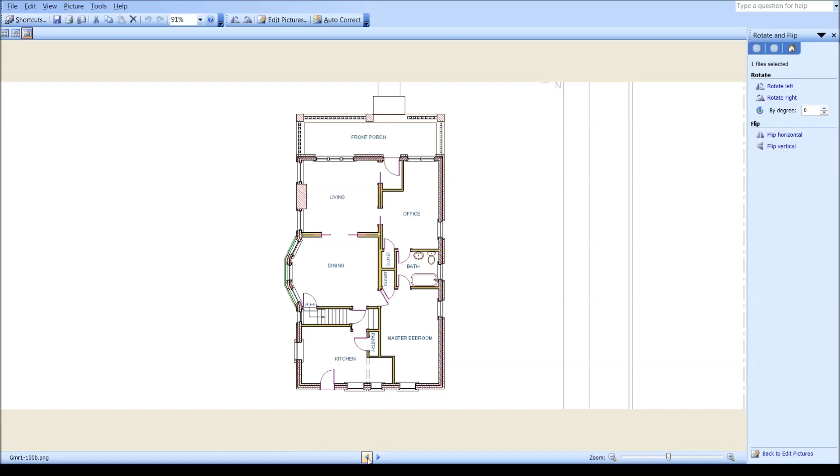Everything works out to within an inch or so, except with regard to the most important part. One of the reasons, among others, that I had to model this entire structure, particularly in the first floor, is because it's this sort of a house where the second floor footprint does not overlay the first floor footprint exactly, and I had to try to locate that.

Now this is the first floor footprint in the red here underneath, and I had to try to locate it, and all the measurements work out where it's lining up where a person would expect, here and here and here. And the way I located the second floor was centering the dormer measurement on the center of the building, and using that in combination with measurements from the stair, that was how I located these walls here. So these were the main walls going in that were located according to those items.

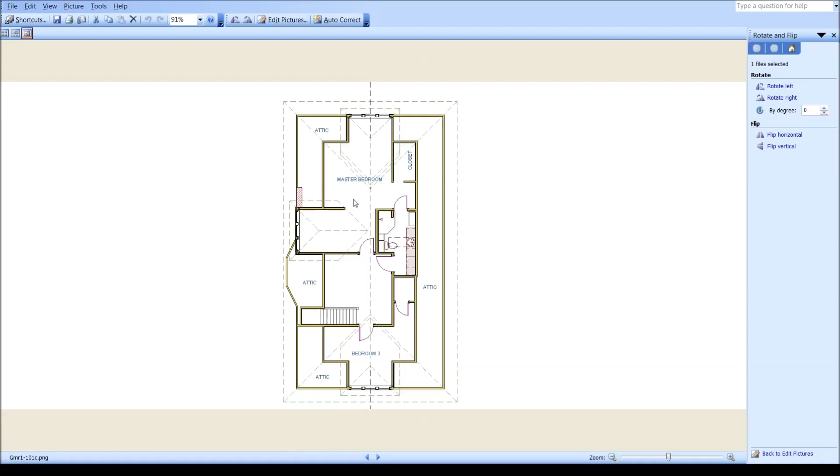You can see that all of these are pretty much within an inch or so, except in this bathroom, and this is where I'd like you to try to help me to clarify what is going on and why things are not working out. These are accurate dimensions.

Remember, these walls here were centering the dormer on the building and then building out from there with all my dimensions. These are accurate here, which means this one's accurate here, and out to here is accurate, and all these are accurate. This, as near as I know, as near as I can tell from my multiple dimension taking, is accurate, where this space from here to here is 86 3/4.

And I know that this 36 is true, and I know that this is true, but here is the thing. When I put these blocks in here, these boxes that you have up there that are 12 1/4 and so forth, and lay this out according to your dimensions, this is a 45 up there. You can tell from the way it lays along the tile. This is 7 inches, this is 25 5/8, and this is 36. But this 36 should be coming down right beside this door, and it doesn't.

And I don't know, perhaps if you could give me some of these dimensions, particularly from that shower base to the wall underneath the shelf, and from the right side of this wall here to that wall. I don't know if this wall is offset from that wall or what is happening there, but maybe I don't have a photo of this whole wall. Maybe this wall comes like this and steps back.

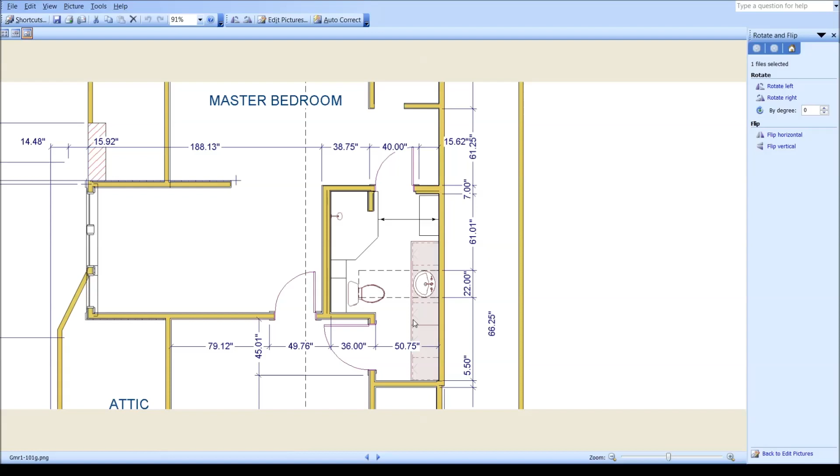I don't know, but anything you can give me to help clarify the width of this in through here, and that will be the final piece of that whole puzzle, and we can finally look at what might be possible. Here's what it looks like from the outside at the moment.

Really this was just put together to figure out exactly how high these roofs were off of the ground and how they're interfacing with that second floor. Here's a couple little films of the first and second floor.

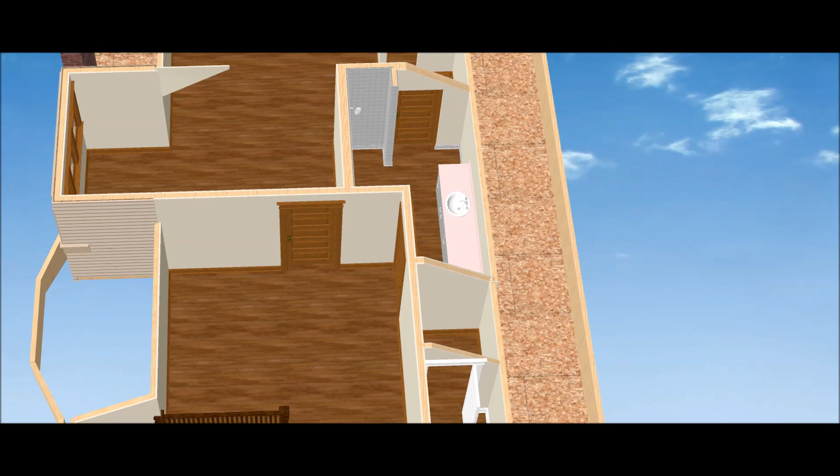And just to return to this to review, and it's not super critical, but I would like to know exactly what is happening with regard to this space. One of the things you can see that I'm showing is that it looked to me like this wall might be thickened based upon my dimensions out here and in here.

It might be thickened by 2 or 3 inches, and that can probably be determined better if we measure, maybe from the surface of this to here and then from there to there, but I can't tell. When I took my dimensions, I measured this 15 5/8 out here to the casing, but in here I had 16 1/4 from the edge of this drywall opening to this. But right now, if I measure that, it's going to be 17 or 18 on this.

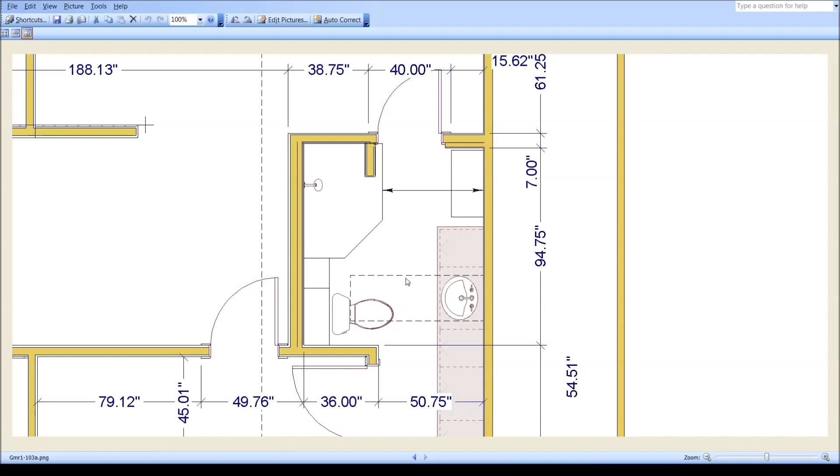So I'd really like to get that clarified, and anything you can do would be helpful. Again, thanks very much.